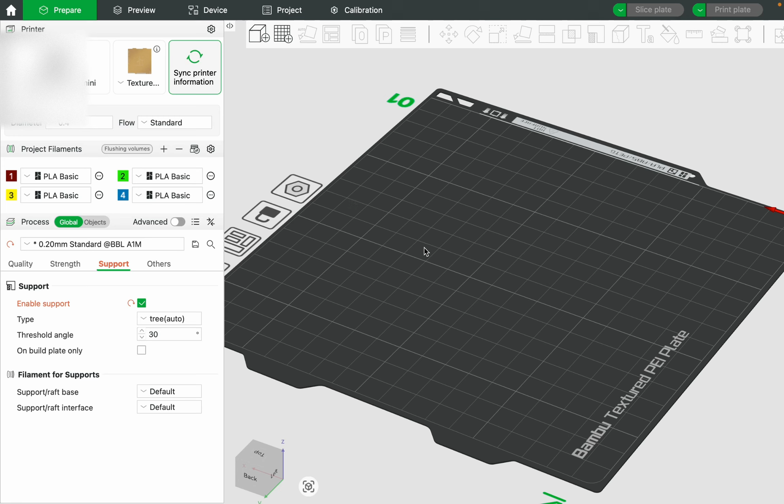So let's get right into it. First thing you want to do is go onto this bar right here, and you could select which type of filament you are putting into your 4 slots. If you have more or less than 4 slots, you can click the plus or the minus. I have 4 slots, so we're gonna go with 4.

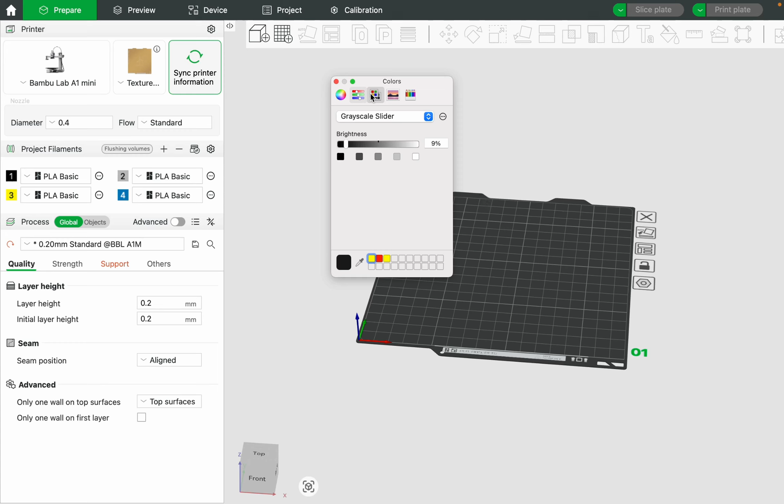Then you can click PLA Basic to change the type. I have PLA, so that's what I'm gonna do. Click the side button right here, and you could change the color if that's not the correct color. Once you've selected everything, well, I'm gonna select mine. Let's go with that.

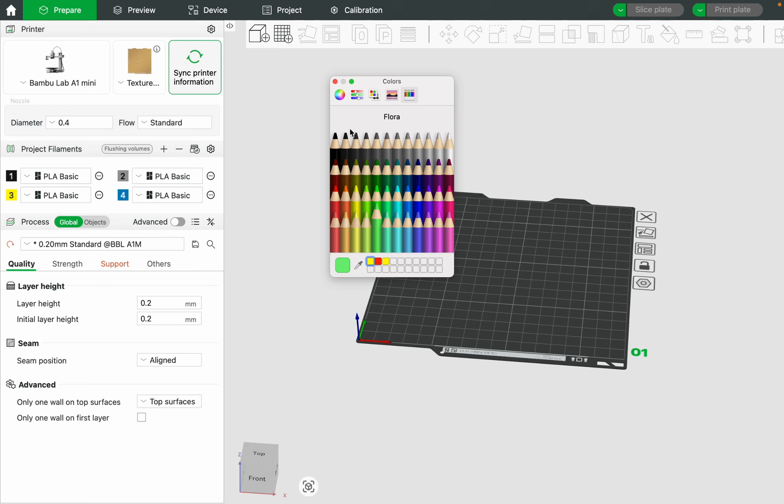Okay. And then let's make black. How about red?

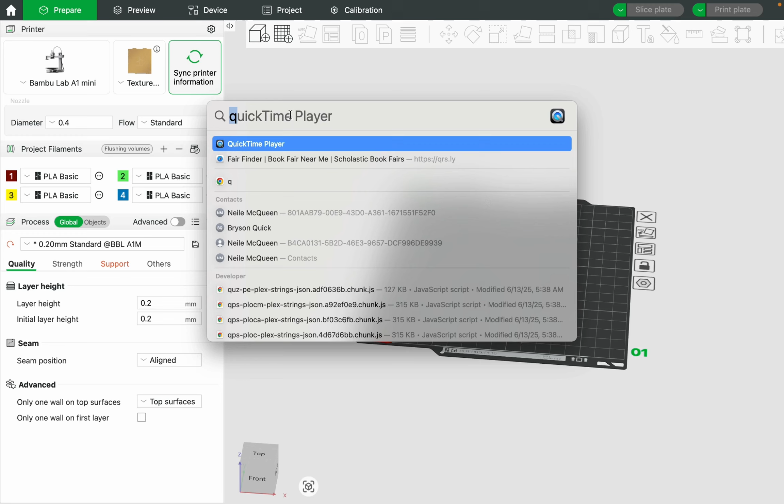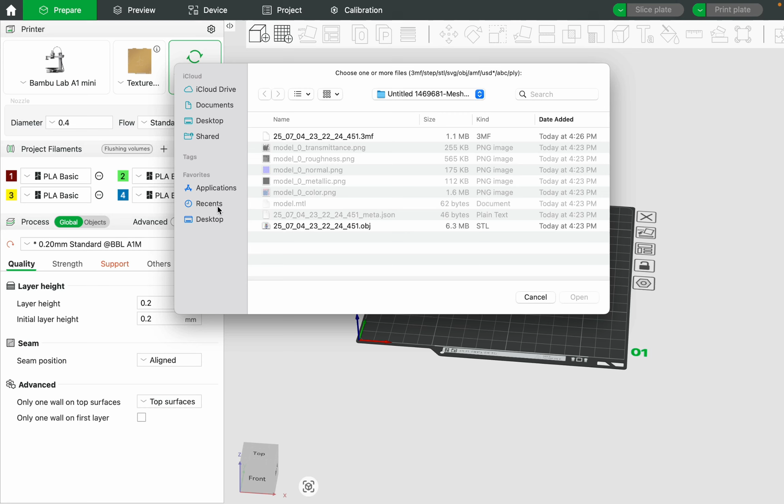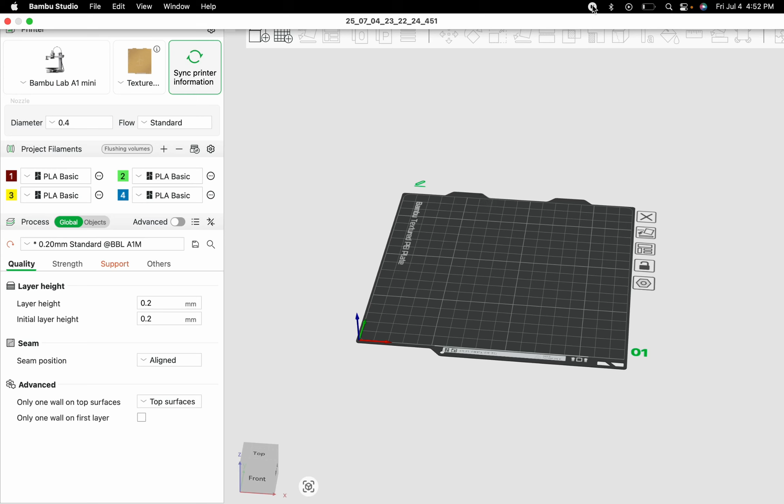Okay, now what you're gonna do is insert your 3D model. So my 3D model is right if I go... open Finder. So we got the thing, let me insert my 3D model. Okay, I'm gonna go. I'll see you when I'm done inserting my 3D model. I'm having a little trouble. Bye, I'll see you when I got my model in.

Now, once you have your model, it's gonna be on the color that's in your first slot. No, I changed the colors and I have 2. Okay, so...

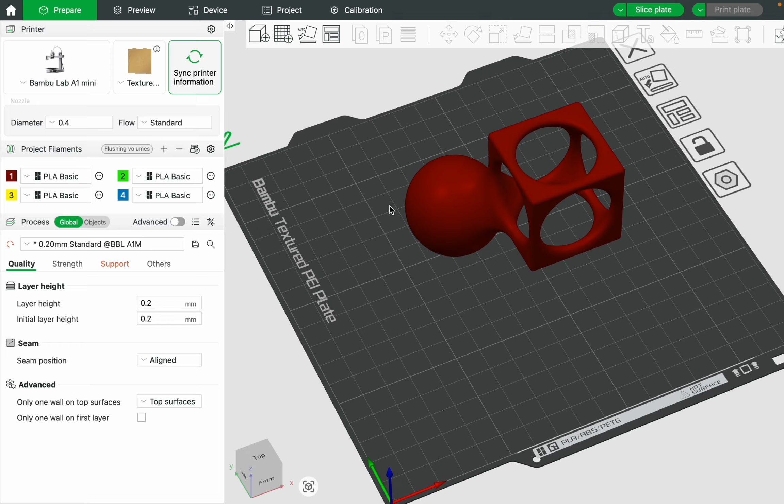Before we get started with the multicolor, I need supports on my thing. So what I'm gonna do right now is put supports. If you want to see how you put supports manually and automatically, watch this clip.

Okay, the first thing you want to do is go into supports. Then you want to enable supports, and it should say something like tree auto or something like that. Now if you want to do it auto, select tree auto, and then if you want it multicolor, wait, and if you don't want it multicolor, press slice plate and then print plate.

If you want it manual, press tree manual. The normal isn't as good as tree, so I'm just showing tree. And then what you're gonna do, press slice plate, wait for it to slice.

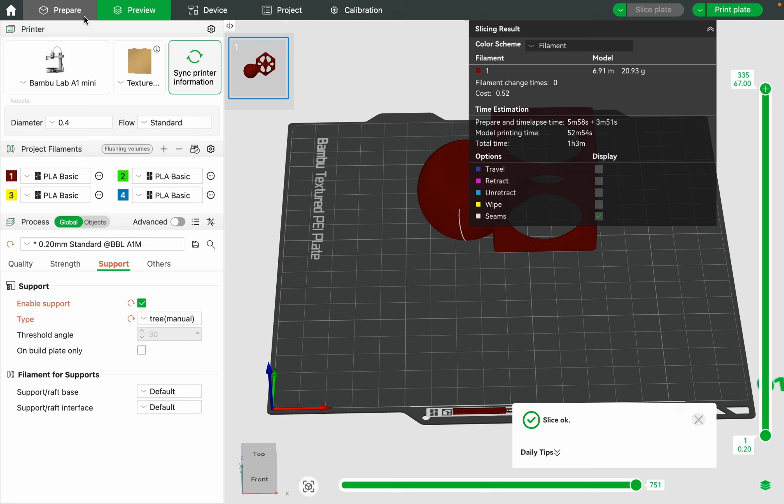Then go back to the prepare tab, select your model, and press this little thing. Then you can draw wherever you need supports. So I need supports right here, so I'm gonna draw right here.

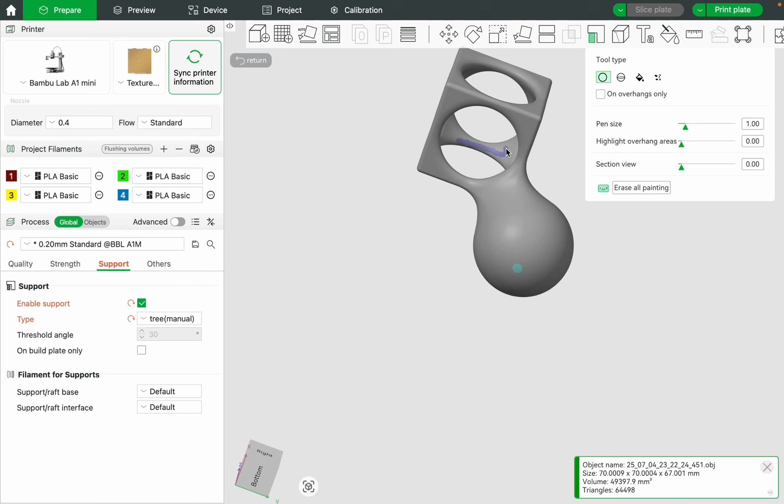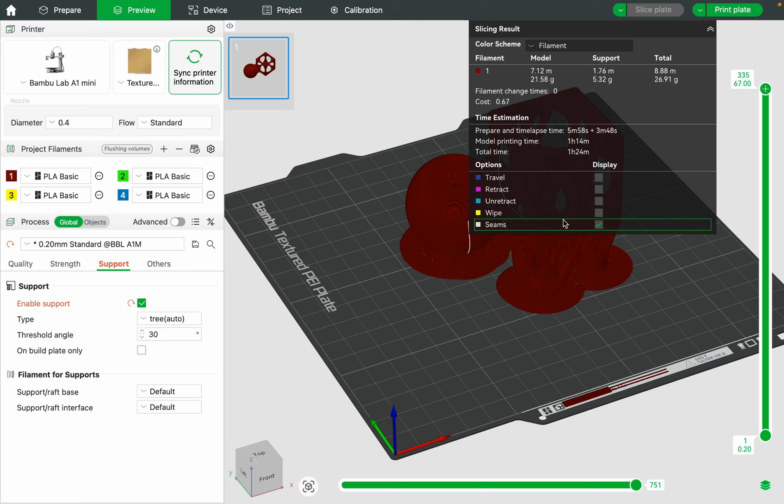Draw wherever you need supports, and then when you slice it, it'll come down. I'll see you when I do all the supports, when I draw all the supports. I draw all the supports and then I press slice plate and then you have all the supports and you're ready to print plate.

But if you want to add the colors, you're gonna have to stay. And so if you have to add the colors, you want to press prepare again and then select your model. It should already be selected. And then you want to press this color button.

And then you could select which color you want and paint. Pen size, there's pen size. So these are the options. There's circle. Circle is basically just, it's a circle. It's just if you want to draw in big areas. So that's circle.

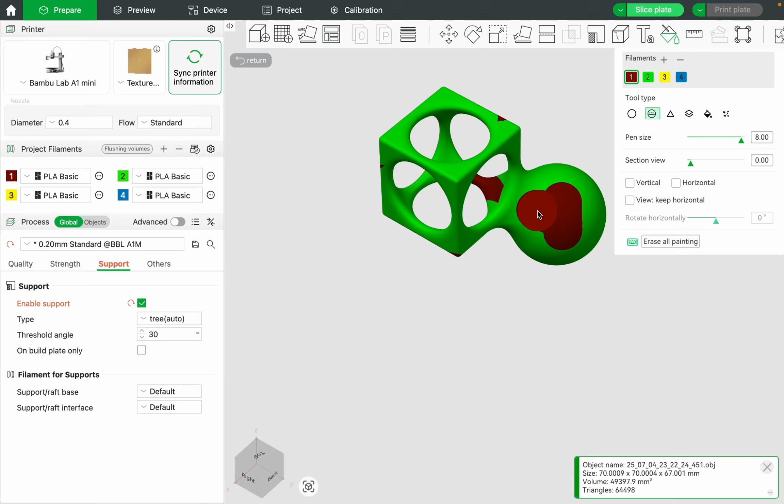And then this is sphere. Sphere is a little different, it's a little longer than circle. See, look, this is circle. One sec, this is circle.

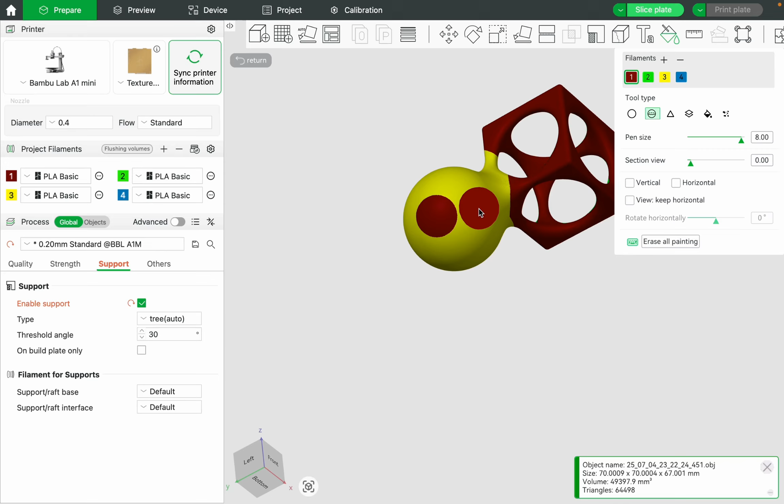Wait, let me color this yellow so you guys can see real quick. I'm using circle. Now, this is circle. Circle is like this. Well, here, let me show you. So I'm gonna just press my mouse pad once, press. Now that's circle, and this is sphere. Press, they're a little different. The sphere is a little longer, but shorter.

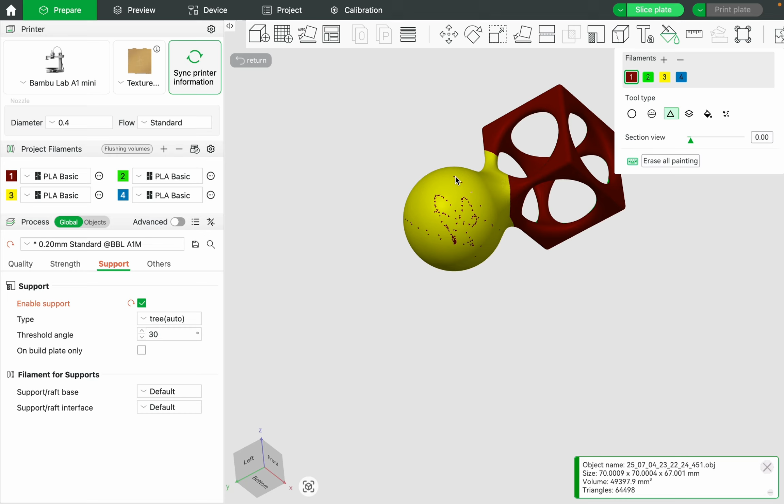Now we'll look at triangle. Triangle will select a triangle of your object and fill it in whatever color you have, or it'll just draw triangles. Triangles if you want it really cool, but this would take really long to print and lots of printer waste, but it would look really cool.

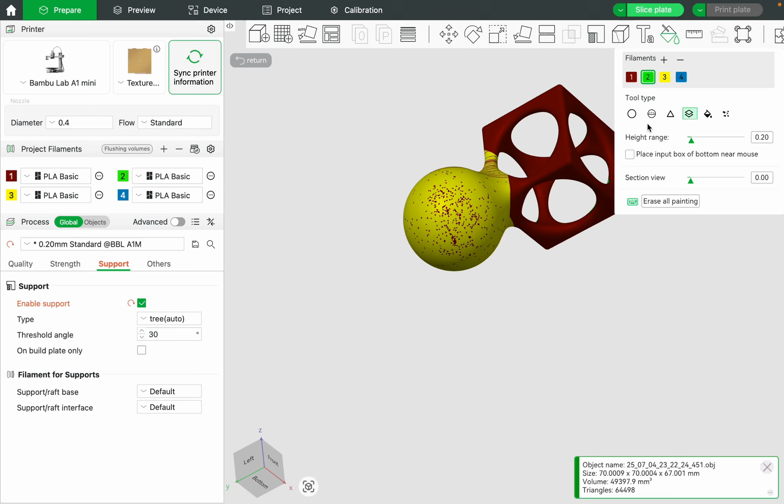Now you want height range. It'll basically draw really high, so it could make it this height. See, that's the height. But then if I want height range more, then it would be more, see. Then if you put it too much, it'll just, like in small models, it'll just select the whole thing if you put it too much.

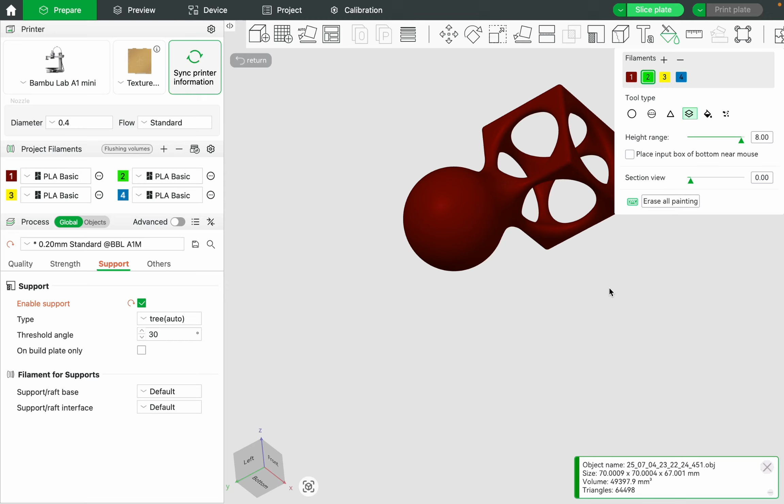Now, you're ready. So you color and then slice plate, wait for it to slice. I didn't color. Slice, OK, it generates my supports because I need supports. And you can press print plate. And then there'll be filaments.

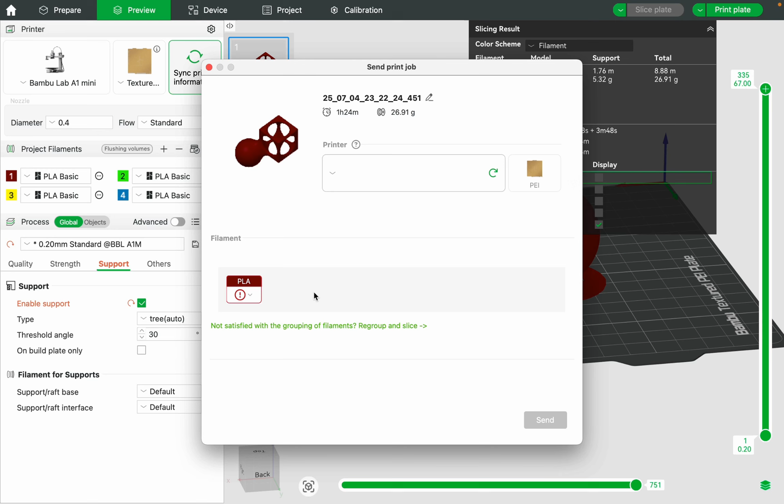But before you print the plate, you wanna go home and go to device. And somewhere on here, it should say the colors that it has, and you want to change the colors to whatever you have on your printer.

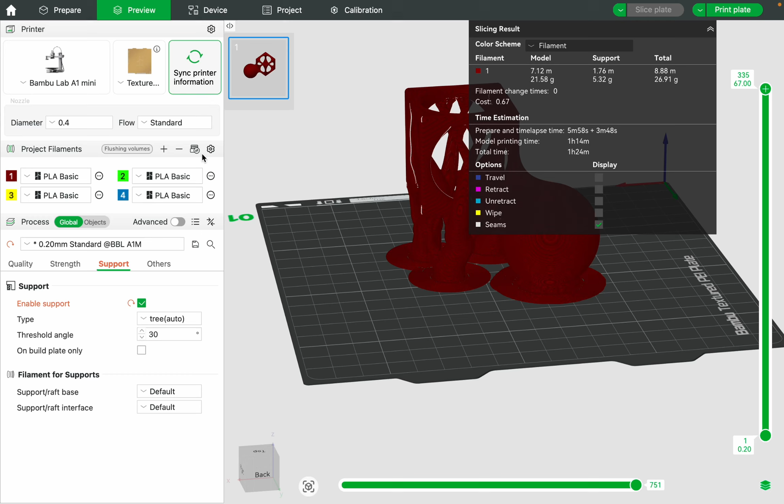Or if you already have it on your printer and you don't want to do that, you can go back to preview, and then instead of selecting that and selecting these, you can just press this button. And then you can print your plate. And that's it.